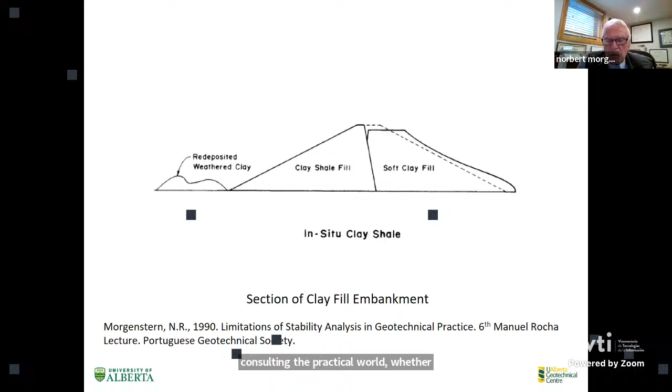And the case histories that follow grew out of that as I became increasingly exposed, mainly in consulting, the practical world, whether they were practical projects of research or related consulting activities, where you encounter more uncertainty than you will in the classroom, of course. We go on to the next slide, please.

There are three sources of uncertainty which are well understood in the vocabulary of uncertainty. There's parameter uncertainty, related to the variability, let's say, of the shear strength spatially and how to do the tests. There's model uncertainty, the uncertainty that I just gave a little example of with the stability analyses that weren't fit for purpose and didn't have deformations embedded in them. We have many examples of model uncertainty.

And there is human uncertainty, which is going to be a large portion of the learnings that I'll be presenting to you. Next slide, please.

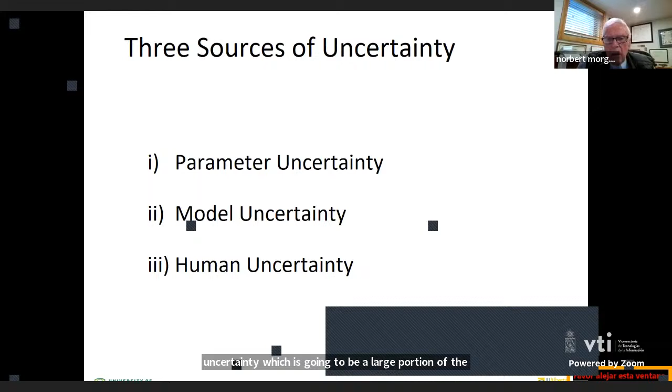In 1990, could you go back to, yes, I'm sorry, is that slide 3? Yes, in 1990, I was asked to give the first Lumb lecture in Hong Kong, named after Peter Lumb, who was the first to go to Hong Kong and teach modern soil mechanics. Just go back, please. Go back one. No, the next one, please. There. And this lecture is an honor. He had passed away by this time.

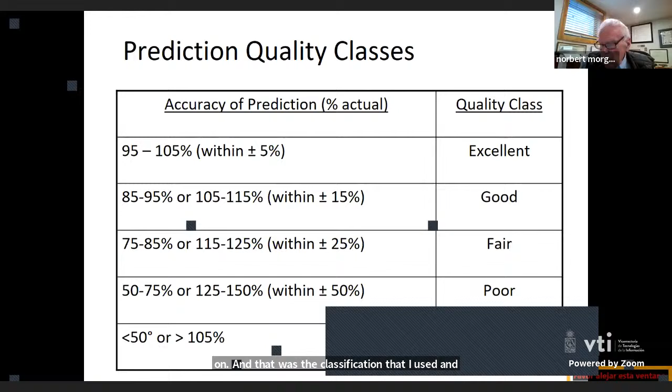What I wanted to do was understand how good we were in prediction, as a beginning portion of that lecture. So I was going to look at case histories, and I set up this classification: if a prediction, a stability prediction or a settlement prediction, was within 5% of what actually happened, then that would be excellent. If it was plus or minus 50%, that would be poor, and so on. That was the classification I applied to a number of case histories. Next slide, please. Go back.

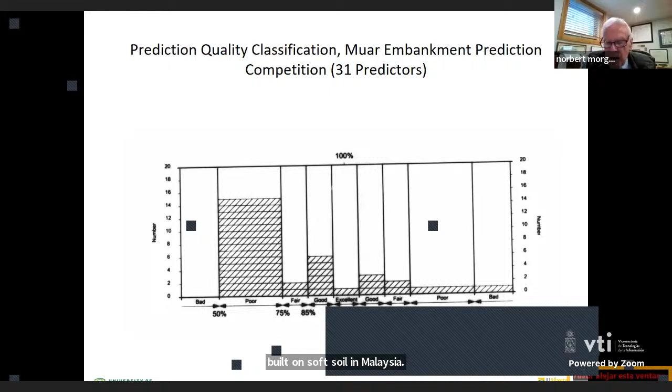There are a number of case histories in this Lumb lecture, and one that is particularly striking is the case of the Muar embankment. The Muar embankment was an embankment being built on soft soil in Malaysia. They were beginning extensive development of their highway system, and they thought they would build an embankment to failure in order to refine the analyses. They had vane tests and undisturbed sampling and all sorts of good things, and people would then submit their prediction of the failure.

They had 31 predictors, and I summarized using the classification how good they were. Of the large number of predictors, there was only one that was excellent, many that were poor, and a number in between, for a relatively simple problem of building an embankment on soft soils. But consider the methodology at the time, and even today: the vane test, undisturbed samples, sensitivity, rate effects in interpreting the vane, all of these matters cloud the accuracy of the prediction and embed various degrees of uncertainty, which prevailed among this group of very well qualified predictors.

And the Lumb lecture has a number of examples like that which led me to the conclusion that we're not very good at prediction. This is summarized in the next slide.

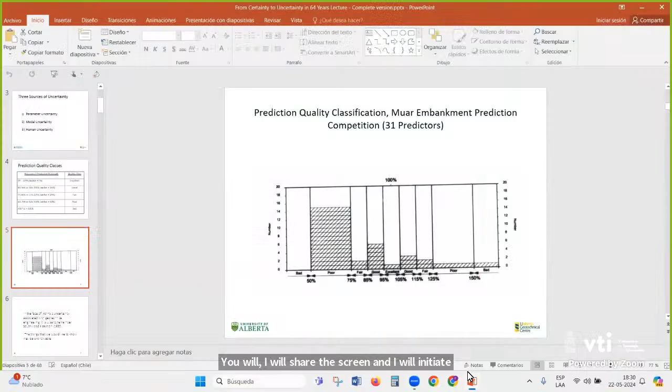The next slide. Professor, can you give us, please, 30 seconds to double check something that might be happening with the screen? I can't proceed without it. Just to double check that everything is working well. I will share the screen, and I will initiate again your screen, Professor. Okay. Thank you very much. That should work better now. So we go to the next slide, please.

As I was pulling together these case histories in the Lumb lecture, I came across this wonderful statement from a gentleman called Southwood, an environmental expert dealing with uncertainty in environmental matters. It said, the things that we'd like to know may be unknowable. I thought that certainly captured the situation for me in 1990, and as we proceed further, it was aggravated even more with more experience. There's an intrinsic uncertainty in our business. If we could go on, please. Next slide.

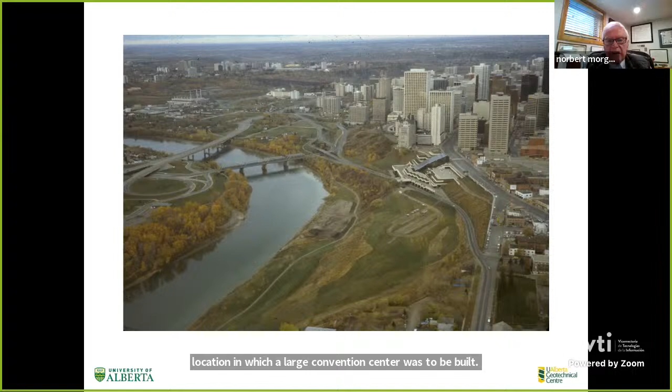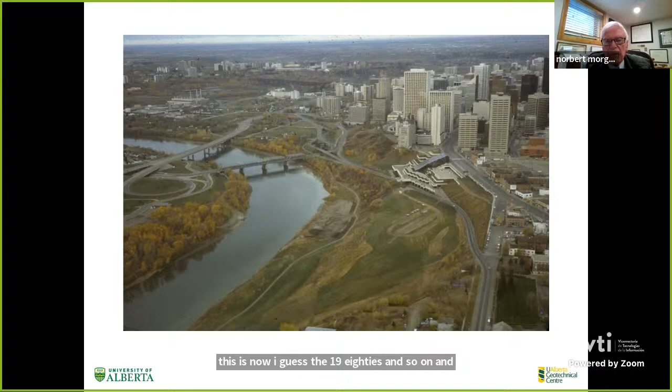The next case history I want to draw to your attention explains uncertainty, and I'm drawing mainly from my own experiences. This is the city that I lived in at some time. If you look down, you'll see a bridge in the middle, and to the right of the bridge was a location in which a large convention center was to be built, with a building down on the slope. We were involved, in the 1980s, in evaluating the location for building this convention center. Next slide, please.

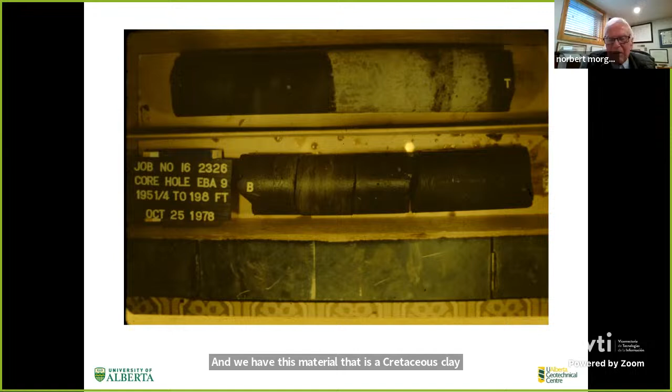And we have this material that is a Cretaceous clay shale, the Edmonton Formation, that you see in the dark core, and embedded within it, you see that light band, which is a zone of bentonite, which I logged myself, because the bentonite is known to be on the weak side. But more particularly, we have a situation where you have glacial deposits on top of weak foundation rocks, which can produce glacial drag that can create conditions of residual strength in these deposits, which means that due to the slip, due to the glacial drag, only residual strength should be operated.

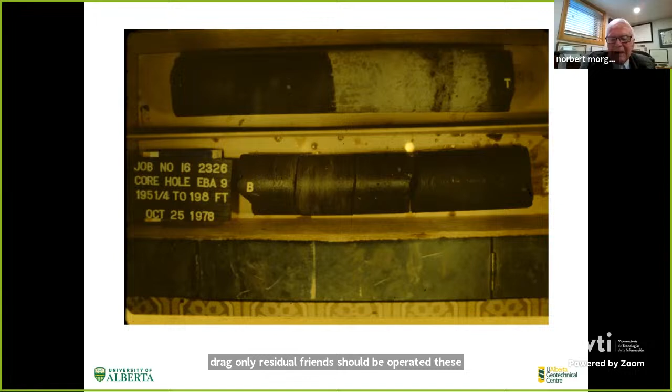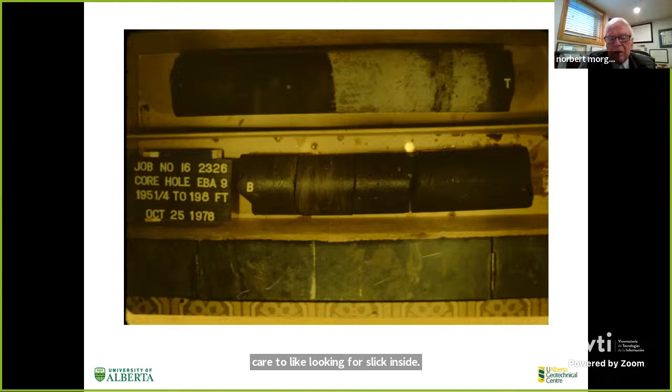So these things have been logged for a long time with great care, looking for slickensides. And I logged that bit of bentonite myself and found it intact, logged it carefully, and concluded that we could proceed in the design using the peak strength of the bentonite as opposed to residual. The peak itself is not huge, it's 14 to 15 degrees, but the residual might be as low as 7 or 8 degrees. So the design proceeded accordingly, which you can look at in the next slide.

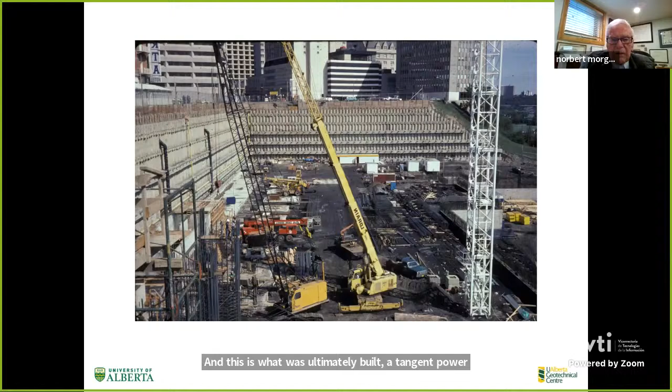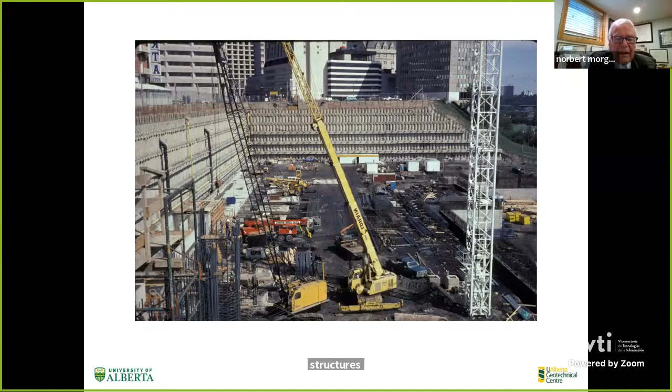And this is what was ultimately built, a tangent pile wall with permanent tiebacks to create the space in which this facility is going to be housed. At the time, the permanent tiebacks were among the highest load tiebacks constructed, because the conditions required to build the wall were to make the deformations associated with excavation nominally zero, designed against K0 pressures, because there were adjacent structures to the left on the slide in which any significant movement would result in cracking and so on. So that was the design of the retaining systems, and you can see it proceeding. And if we go to the next slide.

So that is the design. You can see the different rows of the tiebacks. You can see the presence of shear zones, in which were taken into account some of the residual stability analysis figures. You can see the stress distribution that was applied, that the tiebacks had to honor in order to minimize the deformations at the wall. And you can see that the bentonite zone that I drew your attention to at elevation 635 is also a potential failure mechanism, in this case with peak strength, based on the characterization of the core that I logged.

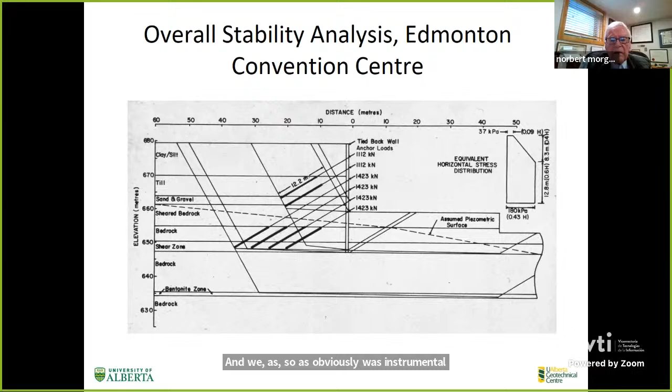And it was obviously instrumented, we had inclinometers and so on. And as we began to excavate, if we look at the next slide, you'll see what we saw. So as we began to excavate, and we certainly weren't down to full excavation, the lower shear zone, which is the bentonite zone, began to slip. We'd excavate a little more, and we'd slip a little more, excavate a little more, slip a little more, and obviously progressive failure was occurring at depth below the excavation because of the lateral unloading effects at that depth.

It was a very uncomfortable situation to come in the morning and call this project and say, they'd excavate a little bit. Did it slip a little bit? Yes, it slipped a little bit. And that was something that we began to live with. Fortunately, we had a fairly large factor of safety against deep-seated sliding of around 1.8, and one could accommodate a reduction in strength. Had it been 1.5 or something like that, I might have had to retire and live in Chile, which would have been a pleasant thing to do, but it was certainly a very stressful condition.

We did not have an understanding of analyses of that material. We didn't have an adequate way of characterizing the progressive failure. This is 1978, 1980. Later on, my subsequent student and then colleague David Chan took on the finite element analyses of this with progressive failure and strain weakening, and actually began to simulate it effectively.

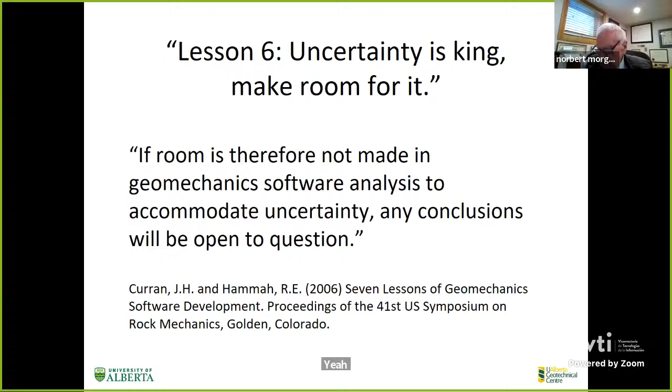There is certainly understanding, and most of these predecessors, Dr. Curran and Professor Phoon, all thought that the best way of dealing with uncertainty is to develop probabilities of failure, and we'll see that my experience with that is not so positive, though my experience with the other ways of managing uncertainty is much more positive, which is the ultimate theme of the lecture. Next slide, please.

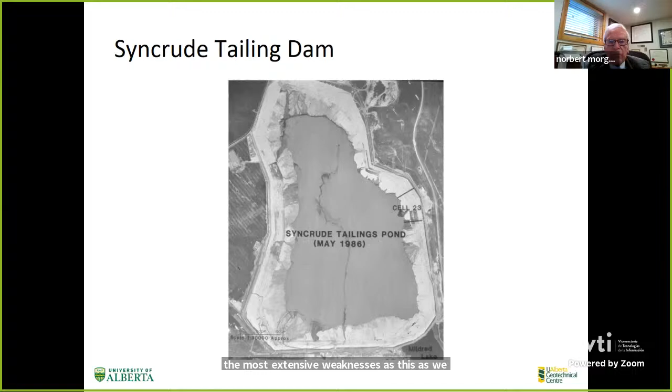Now, the geology at this location is Pleistocene deposits, glacial deposits, and so on, overlying a Cretaceous clay shale of high plasticity. And when you do that, you create glacial drag, which I've spoken of passingly before, but here's a picture of it. So this material has been sheared, not because it's a landslide, it's been sheared by glacial action.

And sometimes these rafts of this weak material can be embedded in the till, but also the interface between the till and the bedrock also has zones of low shearing resistance because of the so-called glacial tectonic action creating shears. So this is an indication of the kind of defect that plagues us here, and you'll see it plagues us in a number of other locations in the world. Next slide, please.

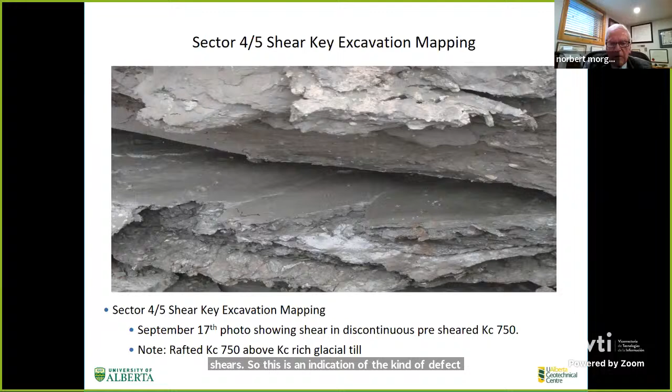So as the dam began to be built at that cell 23, which is the zone of the greatest weakness, you can see that it's manifesting itself down at the interaction between the till and the bedrock, part of it rafted material, and you can see the deformations as we build more. Deformations are developed, measured by the inclinometers that are monitoring this. Build a little more, get a little more deformation. You can follow the history of the slope. You can see it started at one slope, was flattened, and continued to be flattened, and so forth.

So that has a learning, if you like, from the observational method. And now we're going to see how we can manage some of these things, if we can, by probabilistic methods, and then if not, by other, which we'll see are superior methods. Next slide, please.

This is the situation at that location. You can see the failure mechanism going into limit analysis. You have a breakout zone, a passive zone that has to go above the till into a sandier till, providing passive resistance. You have an active zone that is pushing down through the deposits, and you have the resistance being developed at the disturbed clay shale zone with the history that we've just looked at. We're going to explore this and some other cases, whether we can proceed to analyze probability of failure in this case. Next slide, please.

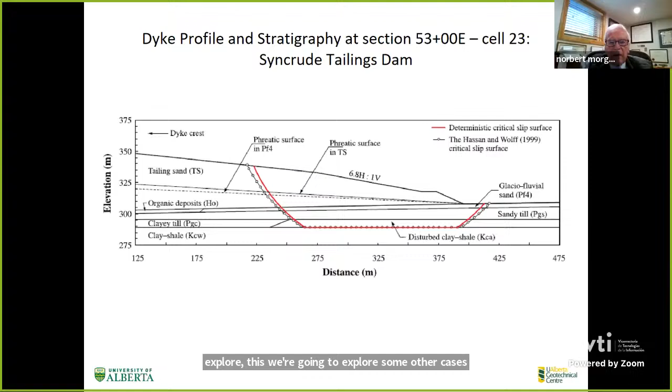So we began to ask ourselves the question, about the year 2000: what is the probability of failure of a safe structure? We had case histories like this one, and other case histories in the literature in which you could say it failed. We knew the factor of safety was one from failure. You could then reanalyze the slope or the dam and make it safe by a reduced strength, but you still have the dispersion of the input data, and you could calculate the probability of failure of what a safe structure would be. Could we have the next slide, please?

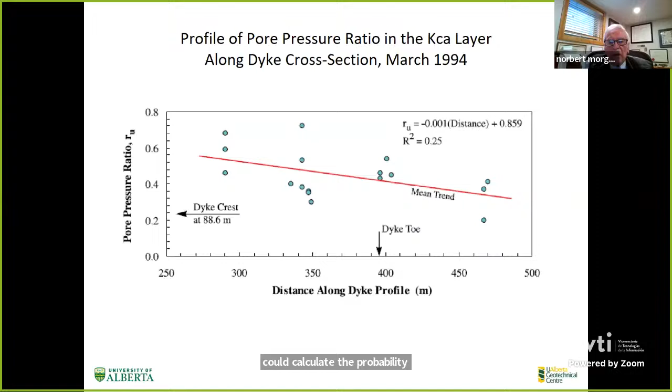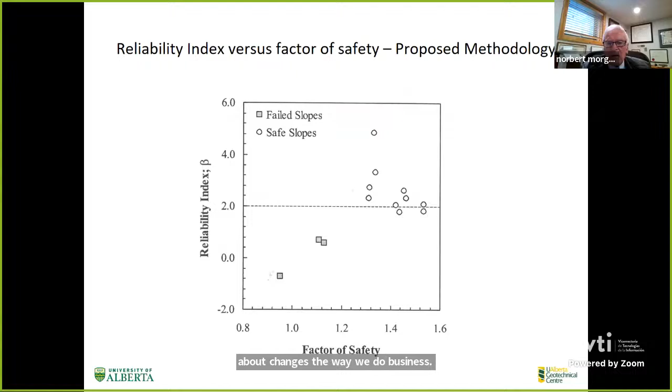However, from that kind of work conducted 30 years ago, it led us to the view that for the class of potential failure modes exhibited by the Syncrude tailings dike we just talked about, it is both possible and effective to construct a numerical model using a history matching approach, providing insight for evaluation of both past and future performance. This became the seed of much of the work that's guided my thinking, because it's the seed of what we now call performance-based design. So the way forward, if probabilistic analysis is not positive, is to manage the uncertainty by embracing it in a history-matching, computationally based numerical analysis of what's going on.

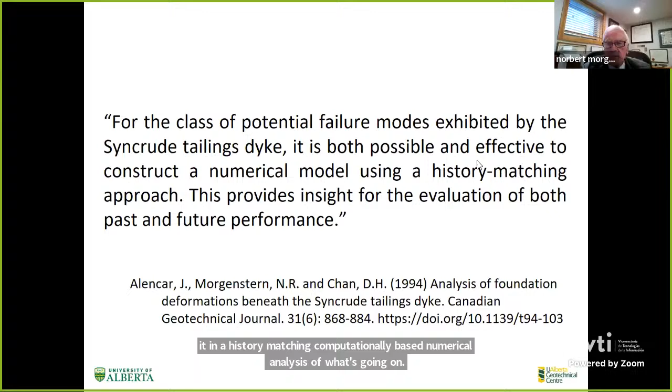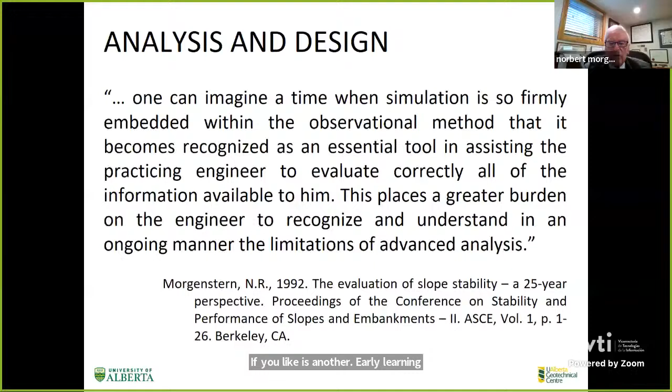I also concluded, in a review paper on stability some years ago, that one can imagine a time when simulation is so firmly embedded within the observational method that it becomes recognized as an essential tool in assisting the practicing engineer to correctly evaluate all the information available to him. This places a greater burden on the engineer to recognize and understand, in an ongoing manner, the limitations of advanced analysis. This is another early learning about the potential and the challenge of doing performance-based design.

We go to the next slide.

In 2011, the dam was completed. I'll talk about some issues during construction, but when it was completed, the reservoir surcharged about 5 to 6 meters above full supply level, near the maximum allowable flood level, in order to manage floods coming down. It was doing its job as required. However, that loading increased rates of shear displacement in the clay in the foundation. Consultants were retained who did a stability analysis and calculated a factor of safety indicating a very serious problem with this dam. The recommendations were to lower the reservoir as soon as possible, carry out site investigations, conduct detailed assessment, and so on, because of concern it was sitting imminently ready to fail, with an unacceptable factor of safety for a dam holding a lot of water.

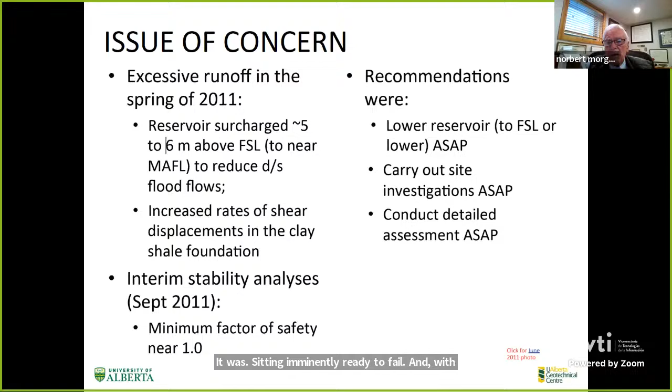The background of the dam is that it's not very high, 42 meters, with fairly routine 3-to-1 slopes upstream and downstream, but the downstream is supported by a very extensive berm. Notwithstanding a knowledgeable review board and experienced designers, the dam actually developed very substantial deformations in its foundation during construction. I was retained to review at that time; the reason for the imminent failure during construction was that the stratigraphy was till over another clay shale with a weak residual at the interface. The kind of mechanism we saw at the Syncrude tailings dam was also here, and it had been ignored in the design. It was moving, so we stopped construction for a year or so and had to build very substantial berms downstream.

But this is the structure that moved under this flood - it had a weak layer in the foundation, well known and under control, until the flood came along.

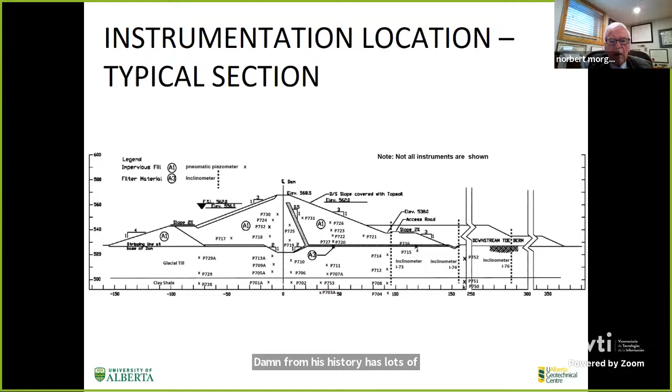The drainage of the dam is fairly routine: a chimney drain going out to a blanket drain with an extension for emitting the drainage. The dam, from its history, has lots of piezometers, inclinometers, and so on, providing a basis for consultants assessing the danger of the structure to be confident they had decent data.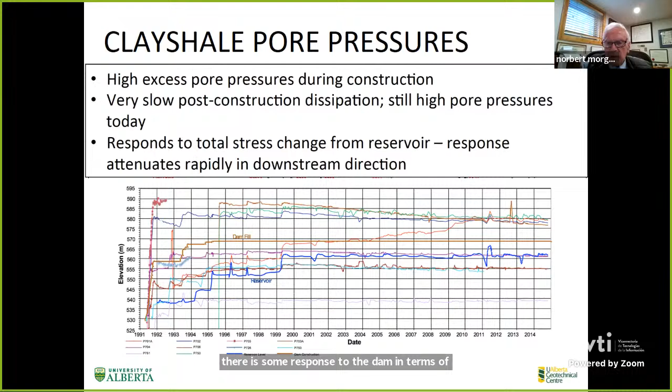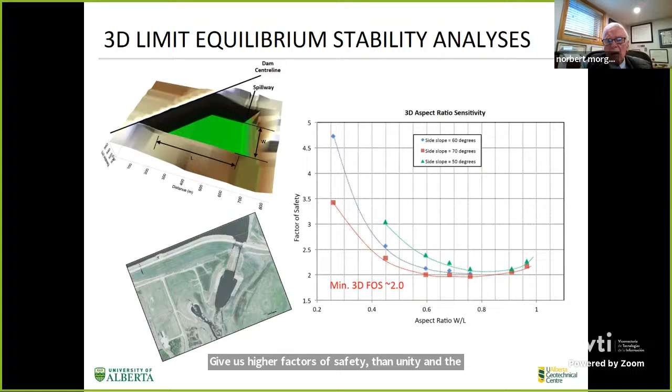The owner wanted to know, look, I've got this defect. It's troubled me up to now. What's going to happen for the life of this structure? We thought the only way to determine what it's going to be like for the life of the structure, now that we've set aside the issue of emergency, is to develop a three-dimensional deformation analysis.

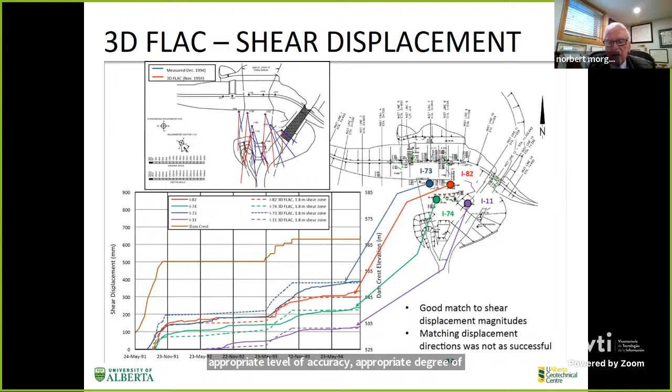So having matched the model response to the monitoring data, we just indicated that we could generate a reasonable fit, and that was all important findings. However, we learned something else.

We learned that there are different ways this mechanism could go to failure. When we try to decide if we're going to continue to have cyclic loading on this, what is its resistance in the long term under the mechanism? If you look at the definition of the factor of safety, it's that number by which you reduce the strength properties to bring the mechanism into limit equilibrium.

It's actually a kind of loading path. Conventional strength reduction, consistent with the definition of limit equilibrium, gives you the loading path to failure. You're going to reduce the C and the phi in that three-dimensional mechanism to different values. However, if you go back to the cross section, which we'll see in a moment, it wasn't being held up by the horizontal material. It was already fully failed.

You couldn't actually reduce it anymore. It was all being held up by the till in the passive breakout zone. Therefore, the failure mode should focus on reducing the strength of the till until failure occurs, which gives you a different number in terms of what its ultimate resistance would be.

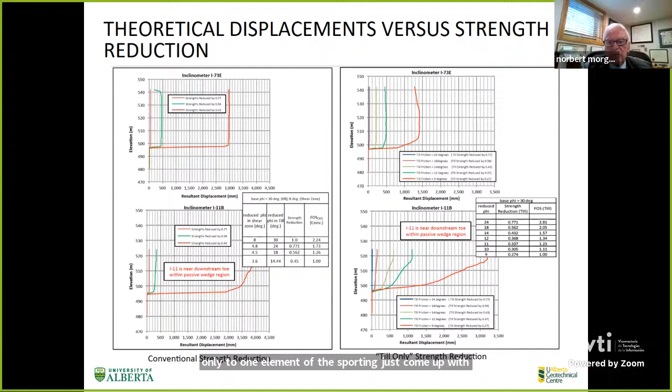So this case history gave us a significant amount of confidence in the methodologies that we're now going to be relying on in more detail, and extolling, in the rest of this lecture. And as I discussed in a summary paper that I also gave in Hong Kong on a special occasion not so many years ago.

But looking to the future, we can move from what I now call precautionary-based design, which is our standard practice. We calculate factors of safety, we monitor, we have the observational method. We're still making observations, but the observational method is not paying attention to the detailed pore pressures or the detailed deformations that we're monitoring. It's making sure that we don't have a mechanism that's catching us by surprise, that we have ignored in our design methodology. That's why I call this precautionary based.

And we can move to performance-based design, in which we have all of the reserve resistances, all of the monitoring, the observational method, and we have real-time responses, and we can recalibrate all of these inputs incrementally in a kind of Bayesian updating way to ensure that we're always catching the right history of the past and have greater reliability making the forecast. And that is going to be the basis of the remaining part of what I'm going to be emphasizing for you. So these ideas were coming together some 5 or 6 years ago.

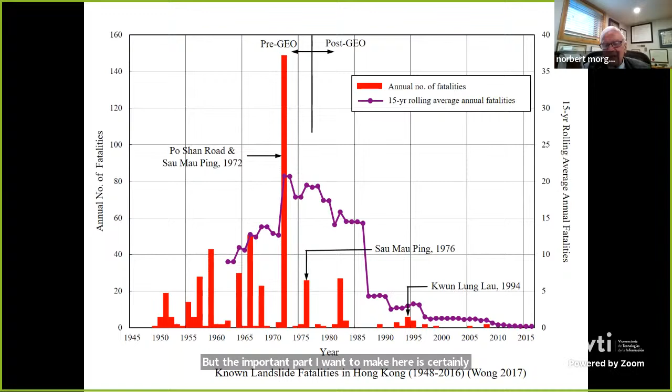But the important point I want to make here is certainly there were analyses and site investigations and so on, but the next slide indicates what the secret of safety was. The secret of safety, and this is to be generalized when we talk about tailings dams in particular and other things that we're all responsible for, comes not from a single calculation, not from a single monitoring, but

comes from a safety system. And that's what was created in Hong Kong, that involved understanding the slopes and checking and understanding the geology and quantifying risk and landslide warnings, and this totality of the system was the learning for most of us as we all participated in assisting Hong Kong to achieve their wonderful end product. And as we're now turning to matters of safety in dams in particular, you could apply it to tunnels as well.

But what is the safety system that we're exploring, that we're evaluating? And it begins with a safety culture. What is the community or the company? What is the safety culture that creates the situation to engage in this diverse number of activities that have to be accumulated and applied and reviewed, checked, and so forth in the safety system? Next slide, please.

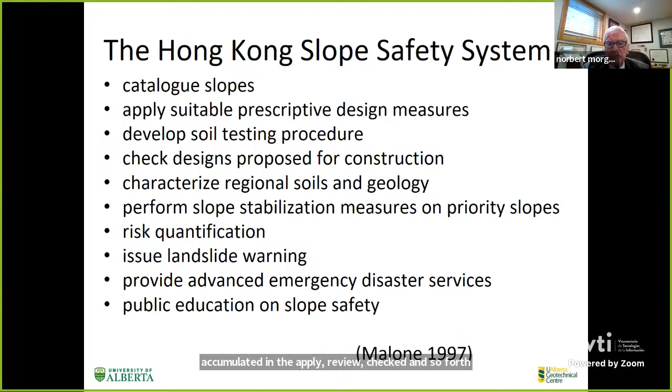So we're heading toward, as the Danilo lecture did, the world of tailings dams, but I want to go through the world of water dams before we get there, to indicate that safety can be elusive unless you're all inclusive. I didn't mean to make a little rhyme, but that's it.

And there was a plan to control this flood by utilizing the spillway, and they found when they did that, the spillway wasn't functioning as intended. There was no other safe way to manage the potential of the flood. It was still raining, and they had to evacuate downstream almost 200,000 people because of the potential of losing the dam in the event that the rains continued. Fortunately, they didn't, and no particular later outcome arose from a public safety point of view.

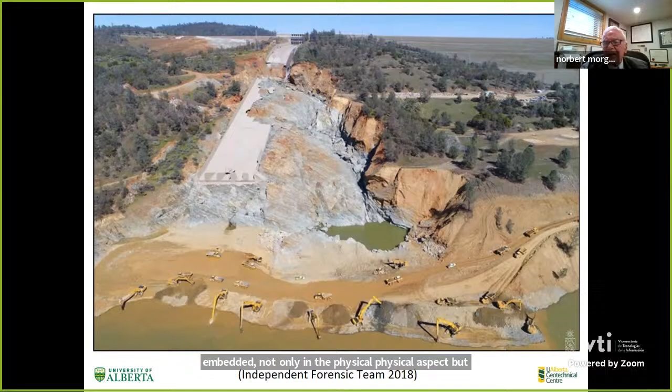And we can see that the pervasive fault was deeply embedded, not only in the physical aspects, but also in the psychology of doing risk in this case. Clearly, the foundation was not built as intended, and all of that is a learning curve. Some of the things that we're going to be talking about: maintaining the integrity of the safety culture requires continuing review and checking. Next slide, please.

Now, I've been involved over virtually the last decade in a number of significant tailings dam failures. And this is the Mount Polley tailings dam failure that occurred in British Columbia in 2014. You can see the dam in the upper left. It's been eroded out by the flow of tailings. You can see the flow of tailings here, and they went out to the right of the slide into a stream and a lake. Fortunately, nobody was camping there. There weren't any casualties.

But we're talking of a structure built by knowledgeable engineers and designers. We're talking of an owner that wasn't one of the largest mining companies in the world, but a substantial company that certainly was, I think, not trying to reduce budgets in any significant way. And we're talking of a constituency, the province of British Columbia, that has a very deep mining culture and regulatory system and so on. And yet this troubling event could occur. Next slide, please.

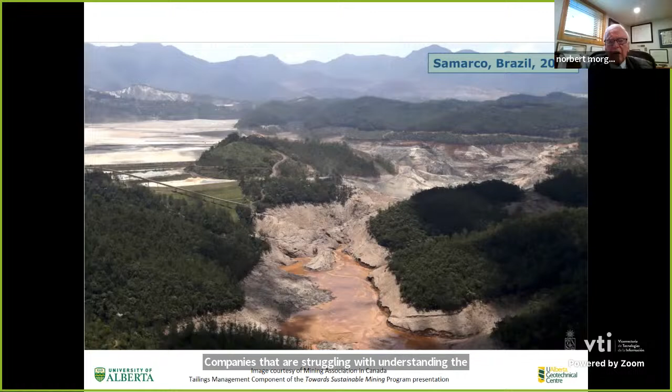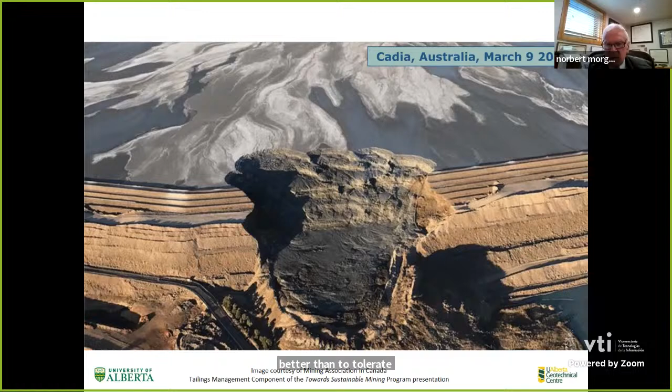So this was troubling again, like the others, that these are issues occurring by people in environments that we've all assumed would know much better than to tolerate them. Certainly they're not tolerable. Next slide, please.

Now, after the response to those dams, the International Council on Mining and Metals took some role. For those of you who may not know, the International Council on Mining and Metals is the association of the largest mining companies in the world. It represents the industry. Clearly it's influential, but it's not a crude lobbying group. It also sets policy and standards, and all of the largest mining companies are part of that.

So they took some actions, and they retained our good friends at Golder to do a study, review tailings management, 2016. Next slide, please. And the study concluded that the review concentrated on governance issues and reflected that basically governance issues, as opposed to technical details, were the major issue. And basically that's what's in the text.

If one were to focus on these and other case histories, a greater number of failures and investigations over the last 20 years, is there anything missing from existing standards and guidance documents that was known and could have forestalled such events? And the answer would be as below, that they fully embrace the knowledge required to prevent such failures. So let me go on to the next slide.

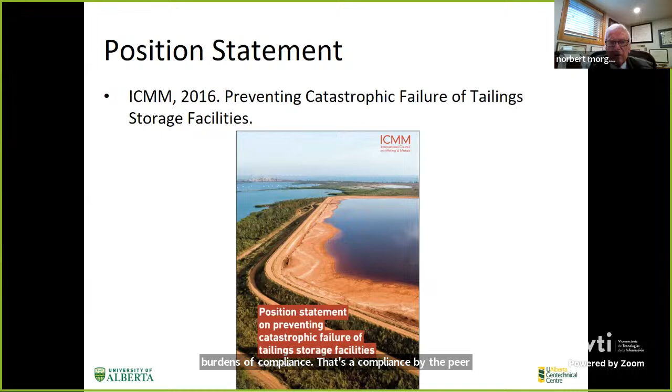And I felt uneasy about the recommendations that came out of the position statement. The technical team had used 3 case histories to support their studies. One was Los Frailes, the failure in Spain. The other was the Mount Polley case that we looked at, and the other was Samarco in Brazil. And as it happened, I had been involved as reviewer of the failure of all 3. And it didn't ring true with my experience to say that technical issues were not paramount, as opposed to governance issues being the dominant feature.

And I began to put together in the lecture the cases related to tailings issues that I've been involved in: some significant failures, like Los Frailes, Polley, Samarco, and some that I knew about because perhaps a colleague had been involved or enough had been published for me to make a judgment of the basic causes. I'm not talking about root causes in a legal sense, but what is the basic cause? And I broke it into three: engineering, operations, and regulators.

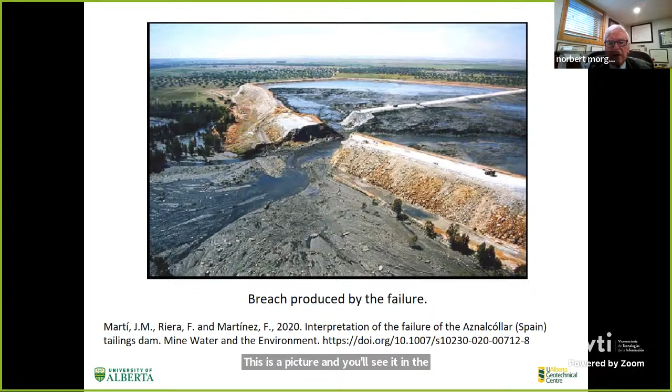Next slide, please. This is the stress strain curve of the foundation material. Now, this is a sample we obtained in the forensic investigations, and we sent it elsewhere out of Spain to do ring shear tests, collecting this strain weakening. And my past colleague Joaquin Martí in the university in Madrid was able to do this in finite element work. Sorry, I'll talk about that in the next slide. We see the strain weakening material very evident.

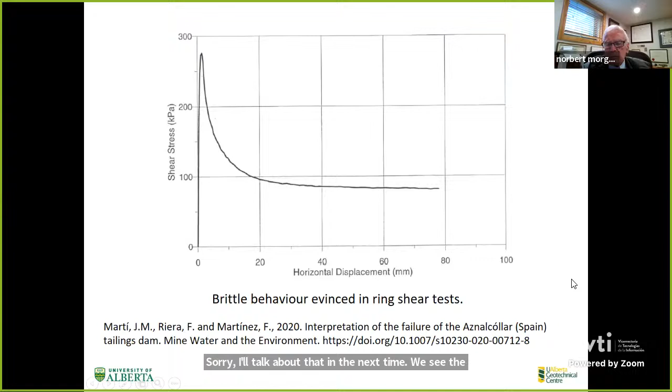Now, I asked the past president of Boliden at the time, how did you get there? He said, well, we came to Spain, we didn't know about tailings dams, and we asked for the best to do this, and this is what we got. So there's clearly no evidence in the design of this kind of clay behavior. There were no piezometers in the design that would have picked up high pore pressures. There were no inclinometers and so on. And these were, at the time, acknowledged as capable designs. This is the work done a long time ago.

We couldn't publish all this stuff because the material was under litigation for a long time, but Professor Martí was able to get some of the papers published, and Professor Gens and others from Barcelona later on published a lot of the details. So this was the early stuff that came from our forensic study indicating that the kind of failure was, if you like, entirely predictable by advanced techniques at the time, but certainly the important point is that the characteristic of the foundation holding up this critical structure was not recognized in any significant way. Next slide, please.

This is a case that you won't find particularly in the literature. It's not a secret, but you can see that this is a tailings dam in the province of Alberta holding up fly ash, and it's being raised, and you can see cracks developing. Fortunately, not creating a failure. And there's a foundation here involving a soft fissured clay that has some strain weakening associated with it. And these conditions were not well understood in the design of this mechanism, which, as I say, fortunately didn't create loss of containment of the material to the left. But the problematic kind of ground that was built on was recognizable. Another example of what I've called embedded ignorance or engineering basic cause. Next slide, please.

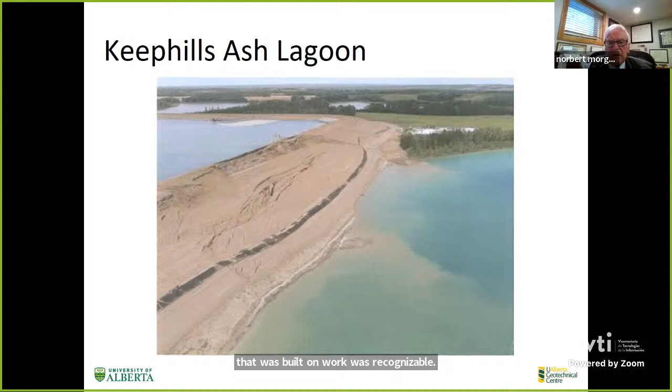So I wrote in the De Mello lectures, the most important finding is the dominant cause of these failures arises from deficiencies in engineering practice associated with the spectrum of activities embraced by design, construction, quality control, quality assurance, and related matters. This is a very disconcerting finding. There is an unwritten covenant in our professional practice with the assumption on the part of an operator that given reasonable resources, and on the part of the regulator that given technical guidelines and a modicum of inspection, the engineering team can be relied upon to produce a tailings storage facility that performs as intended. Experience summarized here leads to the conclusion that this covenant is broken.

And I then follow that by the conclusion that the ICMM-sponsored study and the recommendations embraced by the tailings governance framework issued by ICMM in 2016 were not adequate to resolve the crisis. It remained at this stage within the industry. Next slide, please.

So I then took it upon myself within the DeMello lecture, which is what, 2018, to put forward the outline of the way forward, which is to begin to rely on performance-based, risk-informed, safe design, construction, operation, and closure. All of these had to be developed within the design, construction, operation, closure methodology, at least for tailings dams in the mining industry, and by inference in the water industry, which is separate, different, a lot simpler than the tailings world.

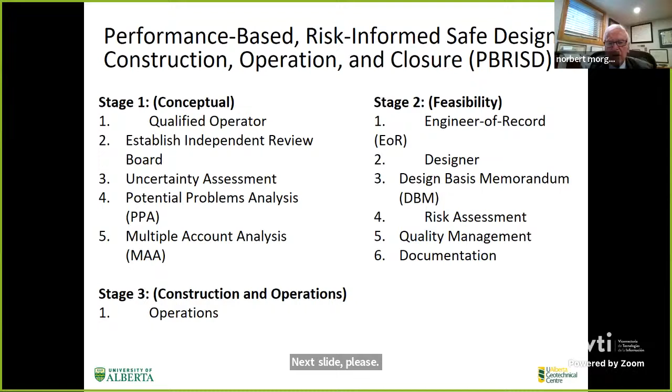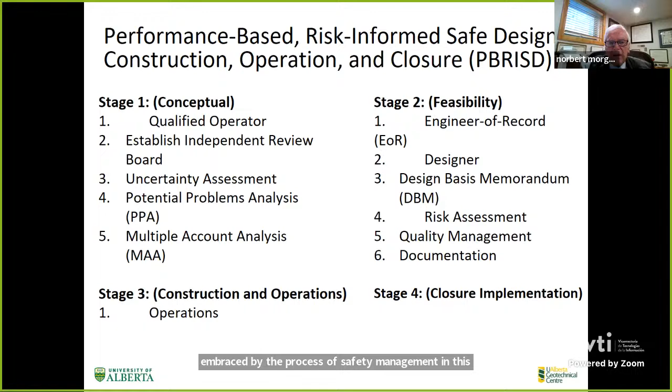Construction, I think we go on to the next slide. Closure is also there. I'm not sure we have a slide for closure. Yes, so all stages have to be embraced by the process of safety management in this more comprehensive manner. It's not just a factor of safety. Next slide, please.

So at that time, I had made a recommendation to the ICMM that they should change what they had published and pursue in a more comprehensive manner what we had just put forward as PBRISD, that should be the way forward for the industry. And that was under evaluation at the time by ICMM, and it takes a little time to get all of their members on board, but was receiving serious respect.

And you said, well, why did I go there? Well, that's where the power to make change would be. And there were the people at risk, as opposed to going to ICOLD and spending time in a committee that would focus more on the minutiae of geotechnical practice, as opposed to the overarching policy issues that were central to honoring the safety requirements that we had.

At that time, then Brumadinho came along. After Brumadinho, the industry lost its license to practice, which we had actually forecast in the analyses from Mount Polley, in which we said if there's another major failure, the industry will lose its license to practice, and that's what occurred with Brumadinho. That led to the global standard, which was put in place, and here it is. We have no objections to honoring that.

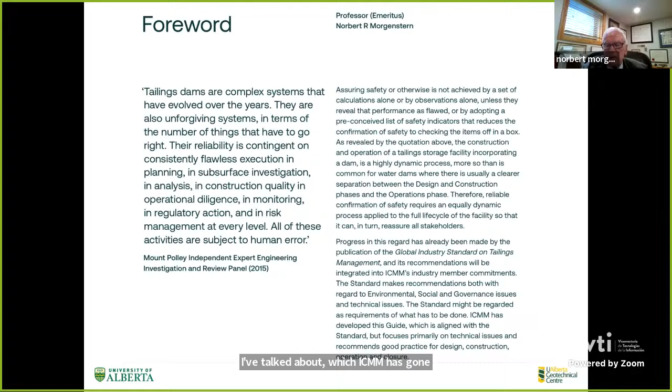It also comes up to the need for the kind of performance-based design that I've talked about, which ICMM has gone to some degree, has absorbed in its recommendations, we'll see in a moment, and indicated how to execute it. Next slide, please.

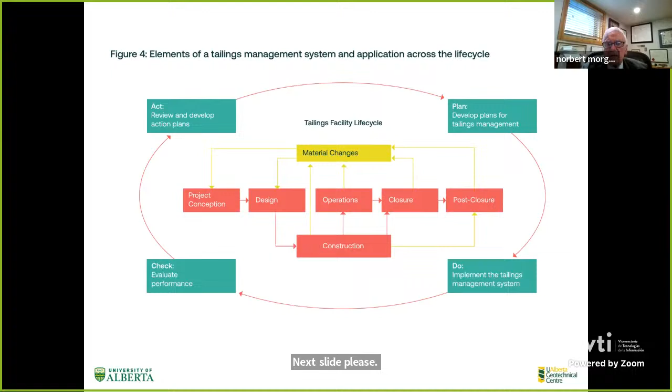So this is the elements of the tailings management. I talk about a system, and this comes out of the Good Practice Guide, indicates the implementations of a tailings facility life cycle system of what we have to manage, and you'll see all of the elements that I've talked about, but they're interactive. You go from one to the other, but you return in some instances, and you're in a process of acting and reviewing and so on in a continuous way.

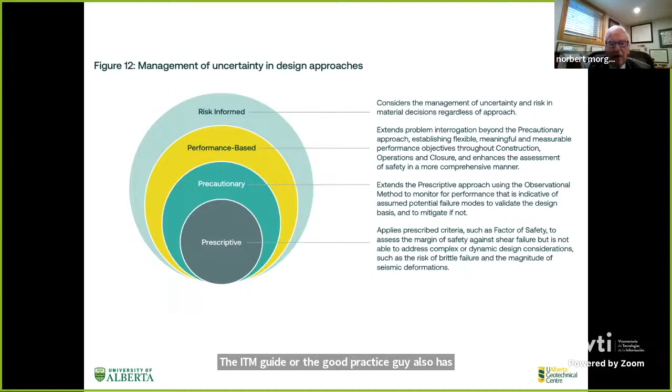Next slide, please. The ICMM guide, the Good Practice Guide, also has this very nice cartoon that indicates the different ways in which we manage uncertainty from a prescriptive design base, that is the declaration just of a factor of safety or some tolerable settlement and so on as a hard number. Precautionary, in which is the observational method, which is our more common practice, and then goes on to honor and support performance-based design, and it's moving into risk-informed design, and it provides text on the right to expand the value of moving to performance-based design.

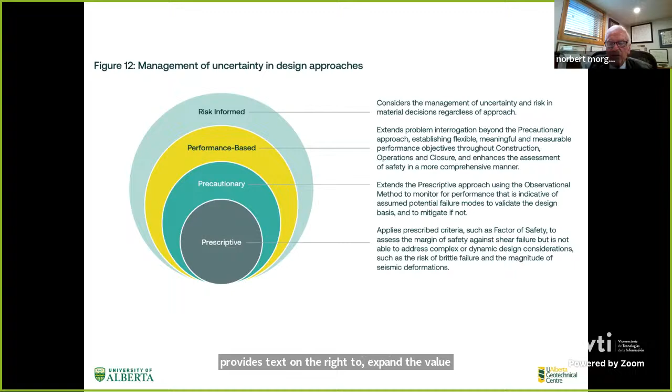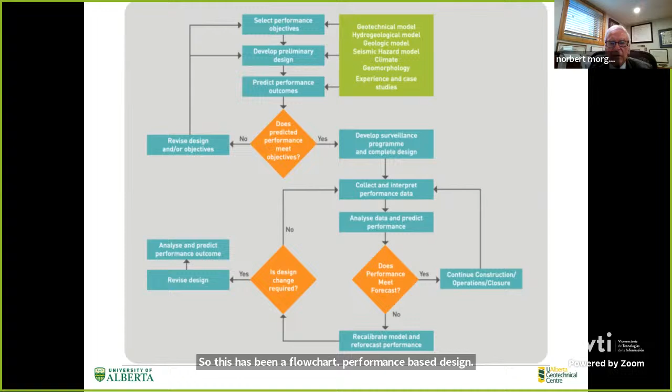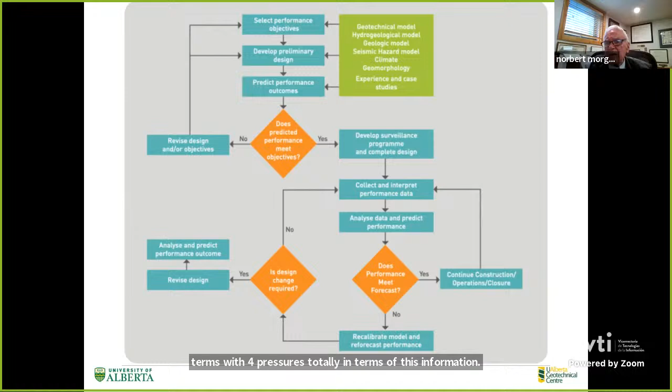Next slide, please. So this is then a flowchart of performance-based design. Select objectives, make measurements, observe performance, revise design - this is an ongoing, self-regulating, self-improving flowchart for doing performance-based design. The performance is not just that it's stable, the performance is totally in terms of its pore pressures, totally in terms of its deformations. Seismic design is totally performance-based design. The factor of safety after the earthquake doesn't tell you how much it's moved, whether it's containment, whether it's cracked a lot, and so on.

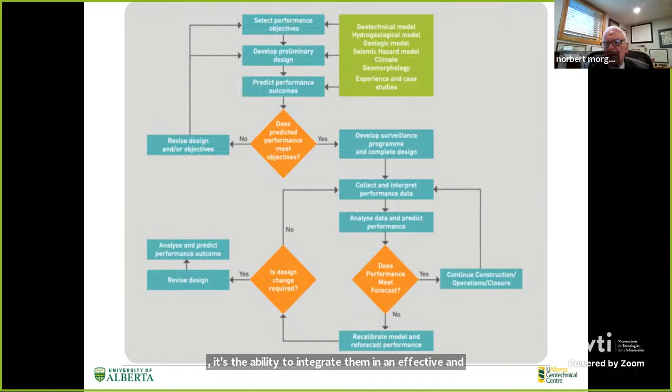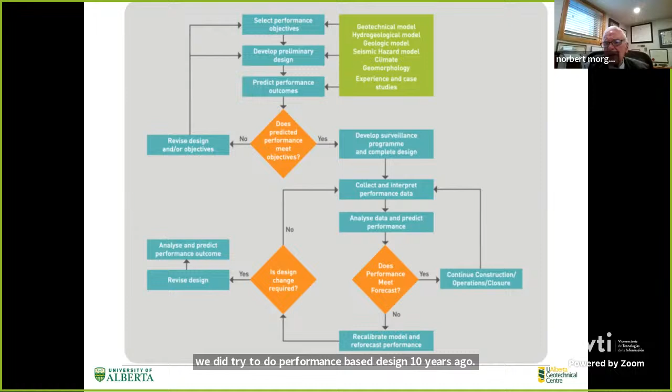So the concepts of performance-based design are not so novel. It's the ability to integrate them in an effective and practical manner today that's novel, not because of the theory, but because we've got such wonderful computational skills. If we did try to do performance-based design 10 years ago, it would take you 6 months to get an answer. Today, you can get it in a day or two. So I think it's the integration with our enhanced capacity that makes it the way forward for meaningful structures. Next slide, please.

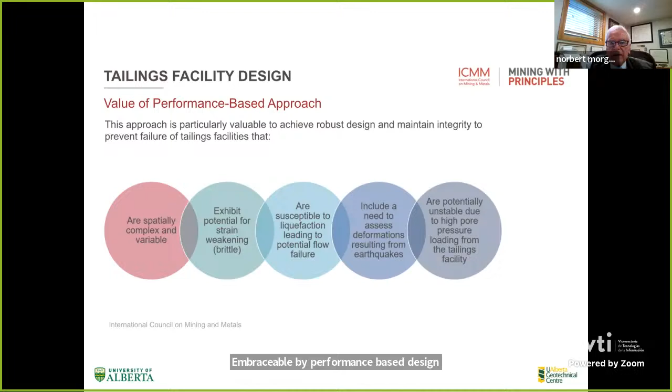Next slide. So the value of performance-based design, and this is taken from the good practice guidelines - these are the things we have to look about: spatially complex and variable conditions, potential for strain weakenings, susceptibility for liquefaction, need to assess deformations, instability due to high pore pressure. These are all interactive and all embraceable by performance-based design, and the desire to achieve robust design and maintain integrity to prevent failure. Next slide, please.

Now, heading to closure, I want to talk about some examples to indicate that I'm talking about practice today, not theory. And I work a lot, have been for some time, with Freeport-McMoRan, a well-known large copper producer, perhaps not as large as Codelco, but certainly in the big leagues. And they are taking the practice to make public some of their integration of activities to achieve safety. I would say partly because we have a lot of large upstream construction, which are challenged by some who don't know enough, and we're content we know how to build upstream as needed where it's appropriate. Not saying you do it everywhere.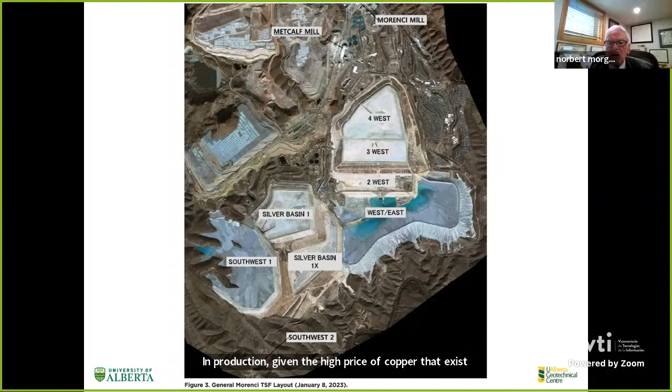This illustrates, at Morenci, you can see the current large active tailings facility on the lower right. A number of them are closed. There's a community you can see in the upper right that has to be reassured that those facilities will not fail and flow into it. We're just in the middle of looking for a new site to expand production given the high price of copper that exists. So this is a very complex, large facility that's executed, and you can read what they've achieved in their excellent tailings mine management system.

Heading toward the end of this presentation, it's an advocacy for performance-based design. Instead of my own advocacy, I've chosen here to repeat the conclusions from a very senior consulting company who published this paper in Tailings and Mine Waste a couple of years ago. Key parameters are predicted to be measured and monitored during construction. If performance does not match, the model is updated to evaluate the deviations. If deviation is significant, the potential failure mode and design methods are updated. Monitoring extends through the entire life of the facility.

Consider what may exist, use the best knowledge and simulation of uncertainties to generate the range of reliable predictions. This requires judgment of what constitutes acceptable behavior under various loading conditions, and verifies behavior with observational concepts. So this, if you like, is a restatement of performance-based design from my early statements, from practitioners using it on major projects today.

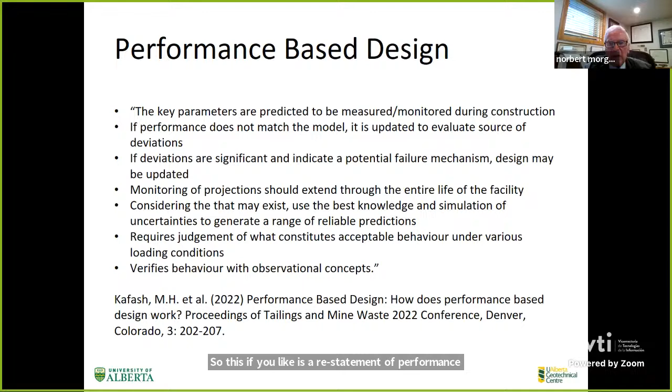So my journey from certainty to uncertainty over 64 years ends up with a positive outcome through the advocacy of performance-based design, building on advances in computing power, software, and instrumentation to allow real-time response monitoring and modeling. In this way, numerical modeling has an integral role in enhancing our prediction abilities and improving the safe design, construction, and operations of geotechnically sensitive facilities.

Final slide, I think. On this journey, I've been accompanied by an inspiring group of colleagues and assistants in graduate studies in my academic career, and from an equally inspiring group in my consulting career. To each of them, I wish to express my appreciation for their guidance along the way, and my appreciation to all of you for being so patient if you're still with me. Thank you very much.

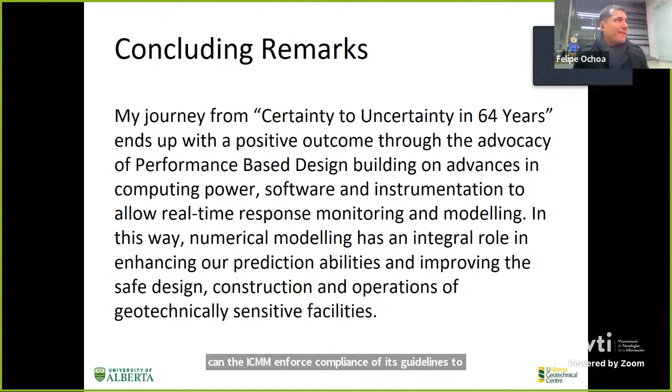That's a tough one. The ICMM can only suggest, I guess - it has no enforcement capacity other than with its members, and you have to be a big and relatively rich company to join as a member. So the enforcement comes by example. For instance, we have situations where companies - I know one large gold company that is not a member of ICMM - now have to explain to their executives why they should enforce these guidelines, because their insurers are asking about it. So it's a question of education to understand what is needed in a company to do the right thing. But ICMM has no enforcement capacity other than by example.

In general, it works like that with other types of institutions. There has been an obligation for all of the ICMM to do risk analyses of their major tailings structures. And all of these risk analyses are now going to be in the public domain. So I think that this excellence by example will have its weight in the investment community.

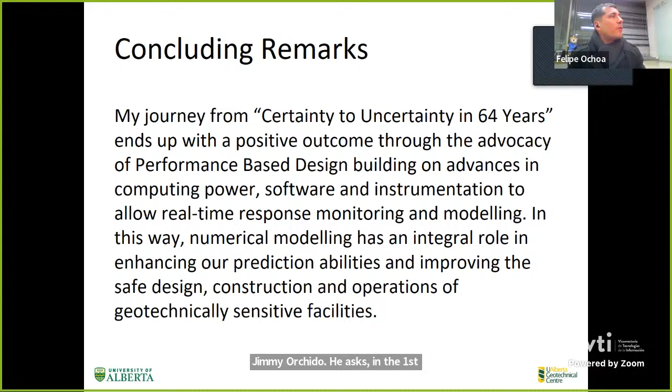Jimmy Orchido asks, in the first case history that was presented about the deep excavation with continuous movements, what were the countermeasures that were used to complete the excavation and the project? The project was completed accepting the continuous movements because the factor of safety was sufficiently high that it may well have reduced from 1.8 to 1.4, but I was happy that I could live with the stress, and I thought it would be fine in the end.

Had we been at 1.5, which might have been an acceptable standard, we would have ended up maybe at 1.1, and then we would have had to stop construction and do more anchors and something very, very challenging. But we had a reserve resistance, not by design, kind of by accident. You mentioned something there very important. It's important for us to sleep in peace, to go to bed in peace. That's right. Yeah, that's very important.

Thank you very much, Professor.

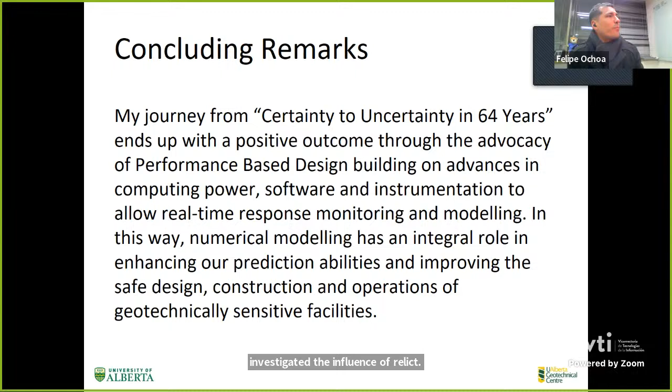There is another question from Matias Bravo. He says, in my master's studies, I investigated the influence of relict structures or discontinuities on slope stability of granitic residual soils, and I continue working on the article. In your experience, what do you think is the greatest difficulty in the stability of residual soils? What methodology or literature do you recommend to address this problem?

Well, I first went to spend time in Brazil many years ago to try and answer those questions because I didn't have enough experience with residual soils at the time, going back now 50 years, I guess. So there are several major issues. Firstly, there's of course unsaturation and the implications of changes of suction, unsaturated flow, which is well understood. I think we understood that in a crude way in Brazil a long time ago, but the details of that need better understanding.

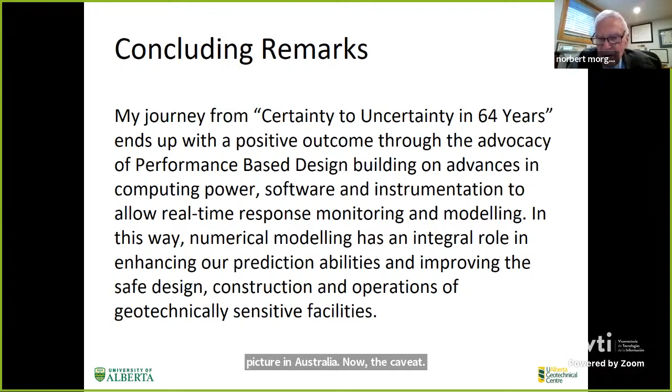But the overarching understanding is the variability associated with the product of the weathering environment. You might remember the Cadia failure that I showed the picture of in Australia. I don't know if the final report is in the public domain, but it's all well understood now. The designers of that dam were very famous world-class engineers. And the design of the dam went through 6 or 8 or 10 lifts. You have a lift and it goes to somebody to put on a lift and so on.

But the early investigation of the foundation recognized a weathered environment, which is common, and there were some clay zones. They took the clay zones in the weathered environment and remolded the material and said, this is the weakest strength we can have. We're not paying attention to anything else in this material. We're going to take the remolded strength. I think I'm repeating this correctly, I may be missing some details now. But that wasn't the case.

When you have an environment of such weathered complexity, there may be a weathered zone which is not remolded, but is collapsible. And so you find that you get to a stage where you've saturated it, you built a dam, and suddenly it collapses. I'm not talking a huge collapse, enough to create shearing, and you're holding up a pile of saturated liquefiable material. That was the mechanism of Cadia.

Now, how can you find that? You're not going to have investigation to deal with that complexity over such a large dam. So you have to have a way of validating your foundation incrementally. You have to have a checking process as the foundation is revealed as you build the dam incrementally. You build it over years.

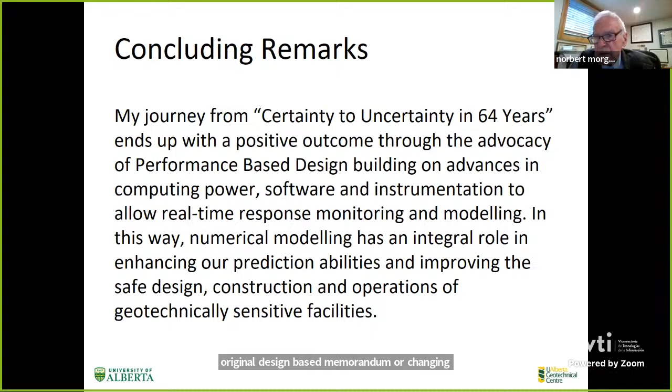You have to map each square meter of the foundation and say it's consistent with the design base, or we have to make change. And that kind of variability is particularly acute in weathered environments. So complexity requires ongoing checking and validation, and either validating the original design-based memorandum or changing it. That was the root cause of Cadia. It wasn't done. And it's very rarely done until recently.

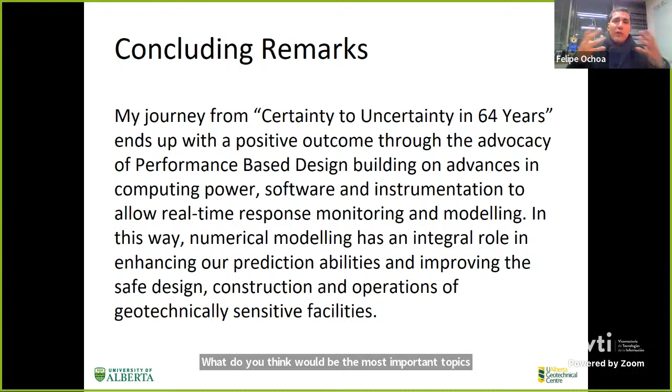What do you think would be the most important topics that nowadays, with all the new concepts, all the new engineering that is proposed around the world, our young engineers should be learning these days, in addition to or instead of what we usually teach?

Well, the greatest lack in current geotechnical education, and we do our best to repair that at the University of Alberta, but it's hard to do, is getting an understanding of the right level of engineering geology. Everybody is certainly happy in learning mechanics and learning finite elements and FLAC analyses, and all of these things are becoming easier. Hopefully, we're making sure they understand them and so on.

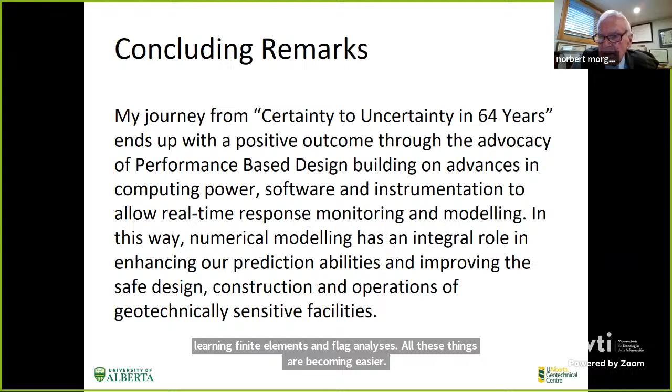But to understand where uncertainty comes from, from the ground, first of all. It's hard to get in the classroom uncertainty from policy, from management, but one should at least make uncertainty from the ground, different environments, different degrees of variability, different degrees of strain weakening, and so on, a central part of a geotechnical academic program, because that embeds the concept of uncertainty and makes one understand that analysis is a servant of uncertainty, not a master.

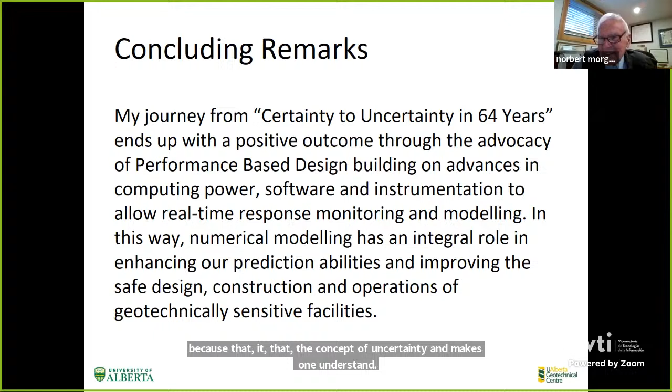Yeah, I agree. We should emphasize. I like geology a lot, and I can resonate with what you are transmitting here regarding the importance of geology. It's very important, geology, and it's not only important, it's also beautiful. It's very nice to study geology. And I totally agree with you, Professor.